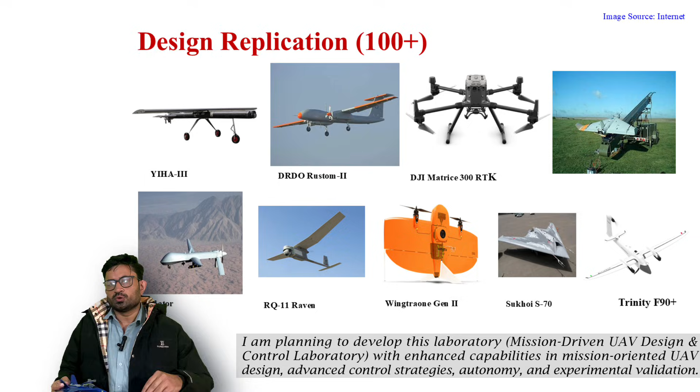As far as the aircraft design part is concerned, although the full UAV design is not considered to be research, part of the research can be implemented to make it good on a product level. Different UAV designs depending upon the mission requirement will be worked on in the future. Design replication means if you have seen some design and are very much inspired, how you can actually replicate the design. Part of your controller research can be implemented in the UAV to make it complete or partially indigenous, and to meet the specific mission requirement.

That means if there is any sort of mission requirement given, around that only you have to design the UAV and make it more indigenous, more intelligent. So that work will continue from the flight dynamics and control perspective, because my research area is flight mechanics and control.

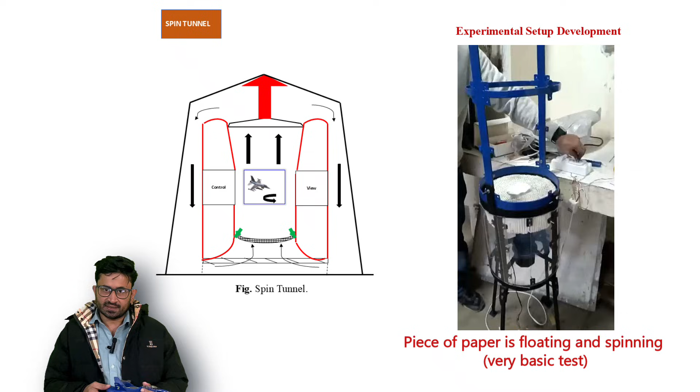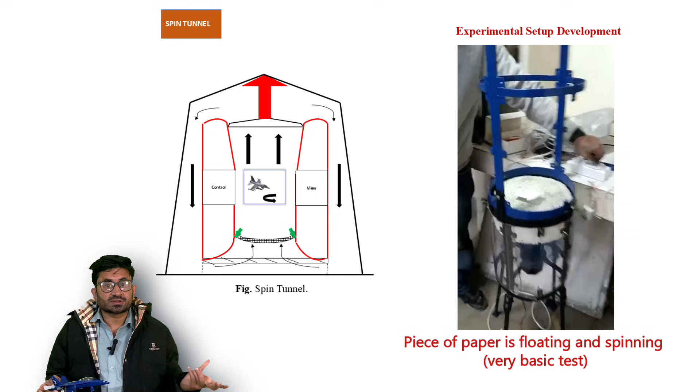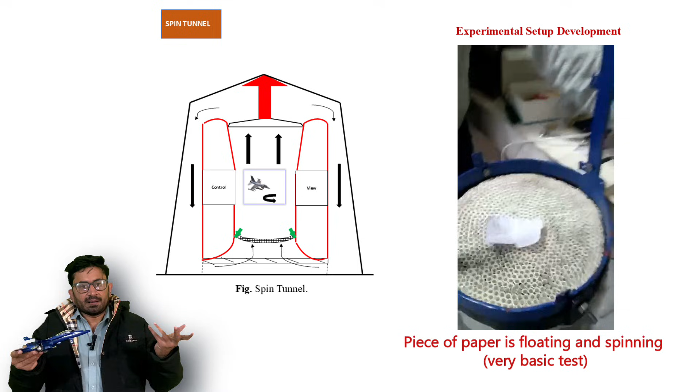Now moving towards my primary research problem, spin recovery. I will be looking to make a dedicated setup on a spin tunnel. I have already started doing some small work with available resources, where you can see a small paper floating in a small scale spin tunnel. When I get funding opportunities and resources, I will scale up, and I will relate the UAV design part with my simulator work also.

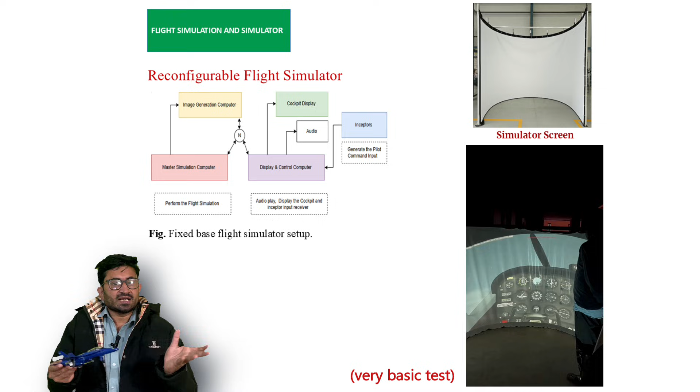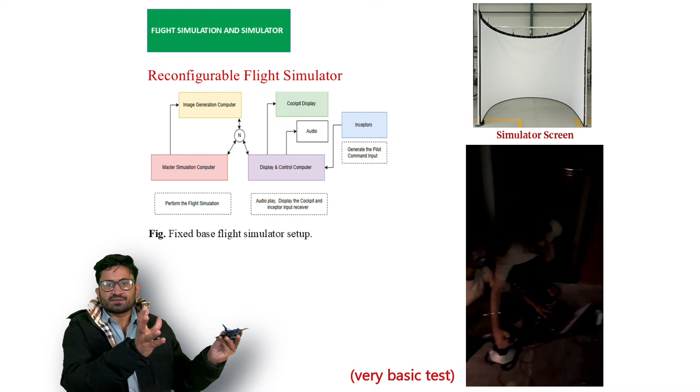For example, if any UAV or aircraft has been designed, you have to have some kind of verification. So we can design our fixed-base own simulator where you can deploy aircraft dynamics, control law, actuator models, everything in software like MATLAB and Simulink, and send that trajectory data to software like FlightGear to have some kind of verification of the design, to see how the aircraft is behaving.

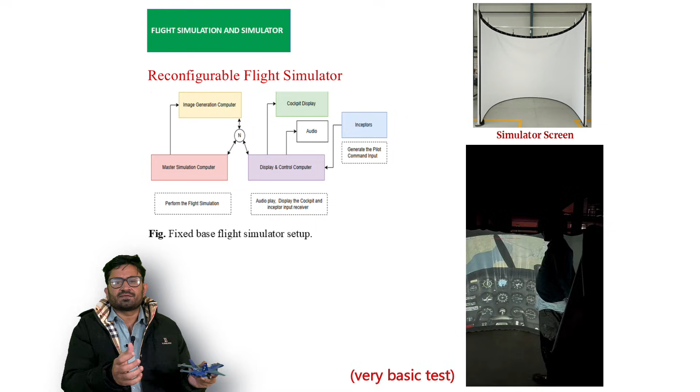For example, you can send the control stick command to MATLAB or any other software. The computation keeps going on in the master computer, and then the data you can send. If you are adding any control logic, any hardware model you can model in Simulink, or any additional control surface you want to integrate apart from the flight control surface, you can see how it will behave at a simulation level. That is reconfigurable.

Basically when you have a different kind of aircraft, you just need to change the aircraft aerodynamic model design parameters, and the simulator will be ready to fly for a different kind of UAV. More extensive work can be done in this area.

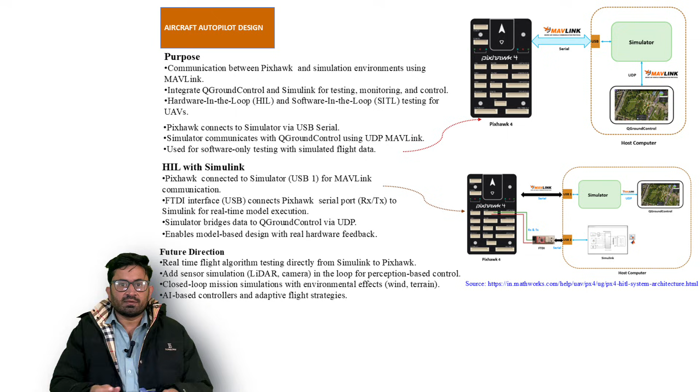Regarding autopilot design and flight controller design, we are working on this and will continue, where you can design your flight controller from scratch, all the control loops, and then deploy this controller to any existing hardware or your own hardware to test the flight controller performance. There are many different ways to design the flight controller, and many different control approaches can be followed. For example, PID, INDI - all are respected controllers, but everyone has certain advantages and disadvantages.

So what we can do here is adopt some model-based controllers like PID, INDI, where these controllers are very good when external disturbances are known and aerodynamic models are known. But if there is a certain kind of unmodeled dynamics, how will you compensate for this?

So we can actually adopt a hybrid type of controller. For example, apart from INDI or PID, we can use artificial intelligence neural network based controllers to estimate the online disturbance in real time, and compensate for those disturbances. By respecting the standard controller, you can even use this controller in an upset flight scenario where you can model the disturbance online and compensate.

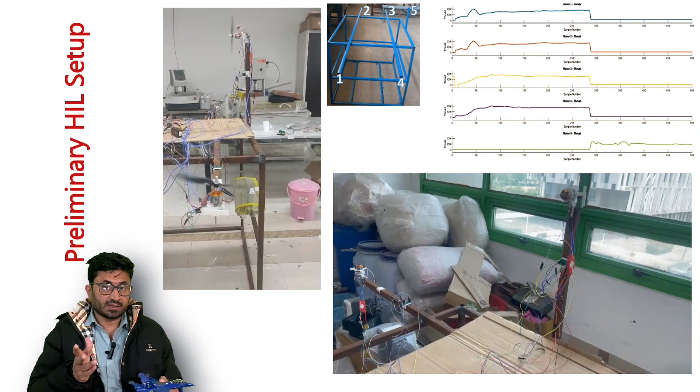This work will continue, and regarding hardware in loop simulation, I will be happy to continue and scale up if I get the opportunity. We have developed a small hardware in loop simulation model, where you can test motor parameters, thrust, torque, battery health, and replicate aerodynamic loading. This can be used for VTOL, fixed wing, or hybrid aircraft.

When we have the opportunity, we will scale up this work, because it is important to test every component on the ground before fitting it into the flight. Also, if you perform any kind of ground test, you can get those results and make your simulation high fidelity, for example actuator characterizations, sensor delay, etc.

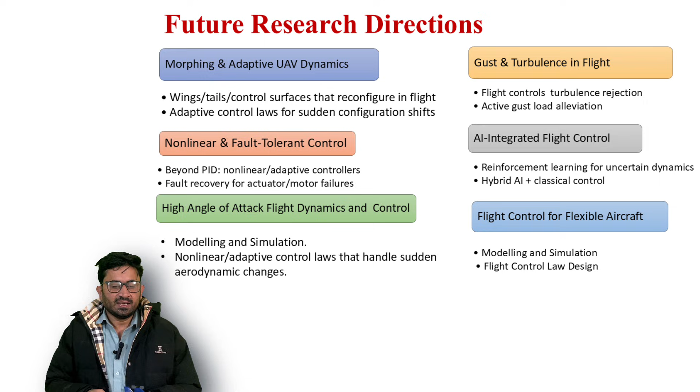Apart from aircraft, I will be happy to work on other aerospace systems like satellites and rockets regarding the flight controller. So if anything new comes to me I will happily share it, and if I add any new research domain to my research journey, I will update you. I am always ready to collaborate - if anyone is interested, please contact me.